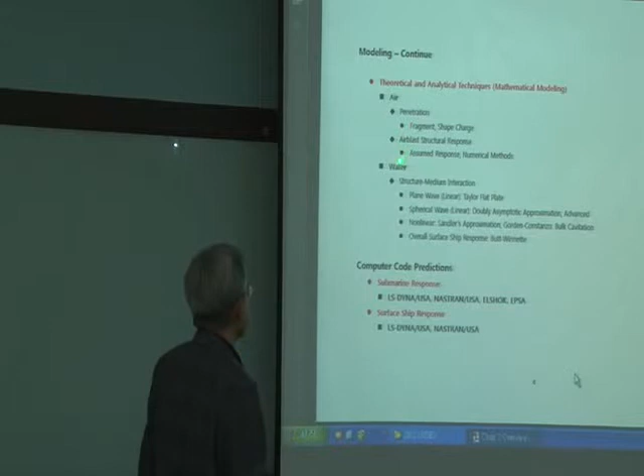Another approach in the modeling is mathematical modeling. So mathematical modeling, you can divide this into air and water. You can study air's penetrations, and then for air, it's an air-blast situation. Water is structure-medium interaction. This is really FSI, fluid-structure interaction.

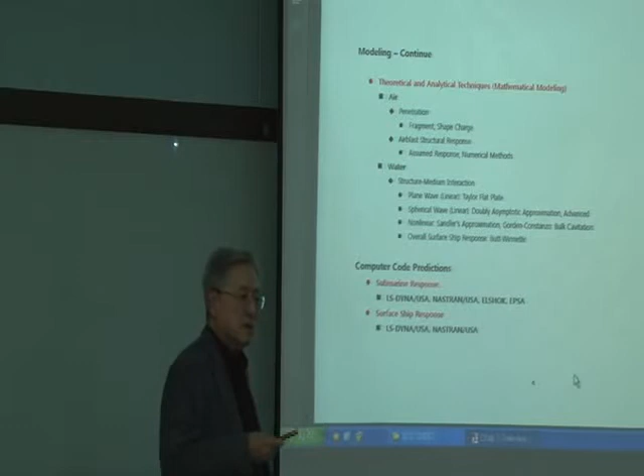Everybody seems to be teaching FSI, but FSI in their field, in their concentration, is what fluid-structure interaction means. Like Professor Park is really expert in acoustic structure interaction, and Higyo is working on acoustic structure interaction. Why acoustic? Acoustic really means shock wave and structure interaction.

The beginning of structure medium interaction. Medium could be fluid. And for gas explosion areas, medium could be the oil or oil-oxidizer mixture. And the beginning is Taylor flat plate theory, which is really the basis, simple, a very nice basis for understanding what FSI is.

That's what I'm going to introduce. And another one is DAA, doubly asymptotic approximation technique.

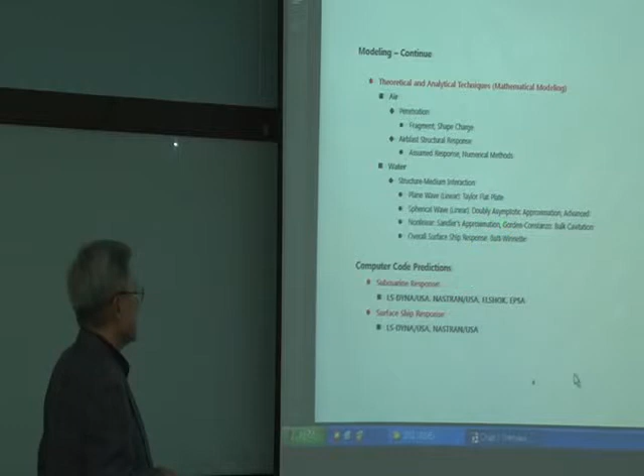Tom Geers developed this not from some theoretical source, but by empirical sense. He put the equation together, building the first order, second order approximation. And nonlinear Sandler approximation, Gordon, and Costanzo. Gordon retired years ago. Costanzo is still working on bulk cavitation computation.

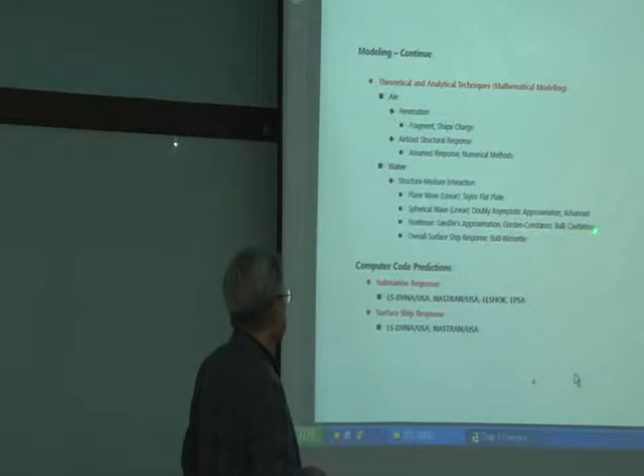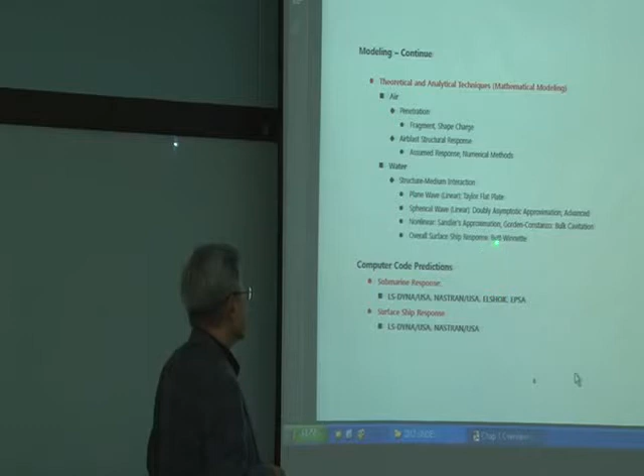And overall surface ship response, this is a very simplified, beautiful approximation technique. Butt, he retired some years ago, at least 20 years ago. Winnette, he retired, I think last year.

So I'm going to show you some, okay? Then you can feel it.

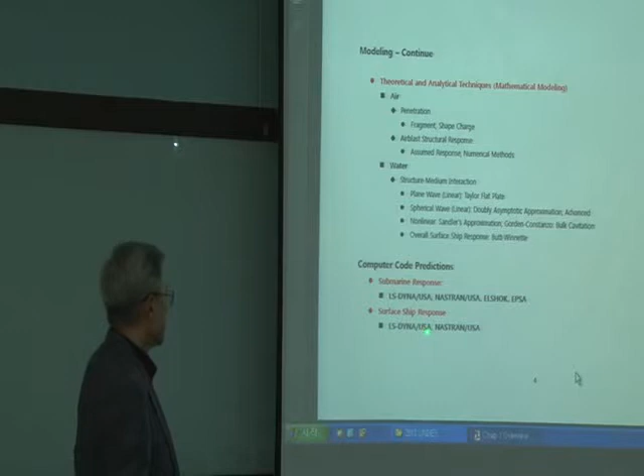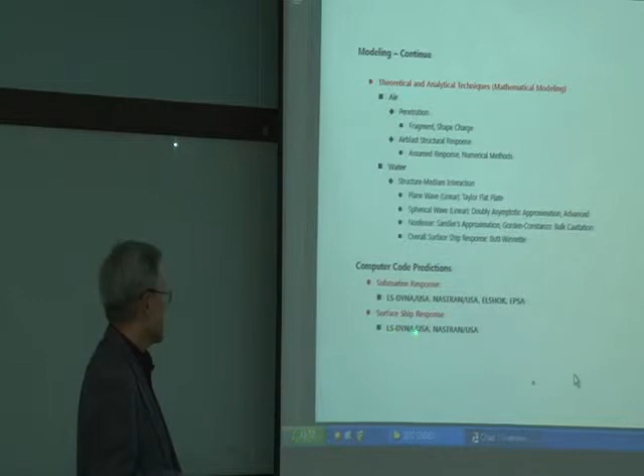And the computer code predictions for surface ships, as we are using it, LS-Dyna itself for near field explosion, and for far field explosion, we are using LS-Dyna combined with USA or Nastran USA. So either software predicts really well, okay? But we are going to use this USA and LS-Dyna.

So right now I think Gaulgi and Dr. Kim, you have to really go through, not this.

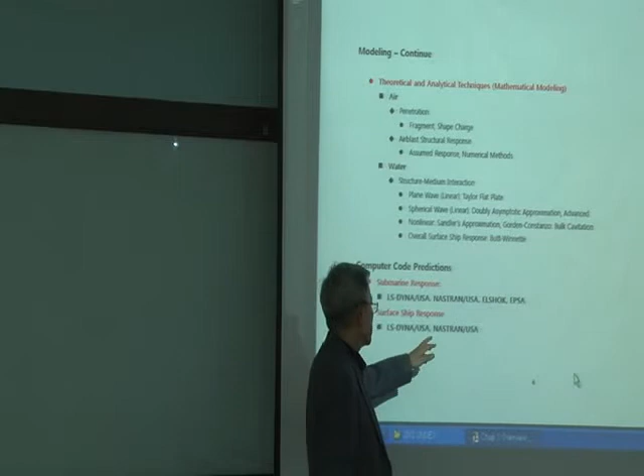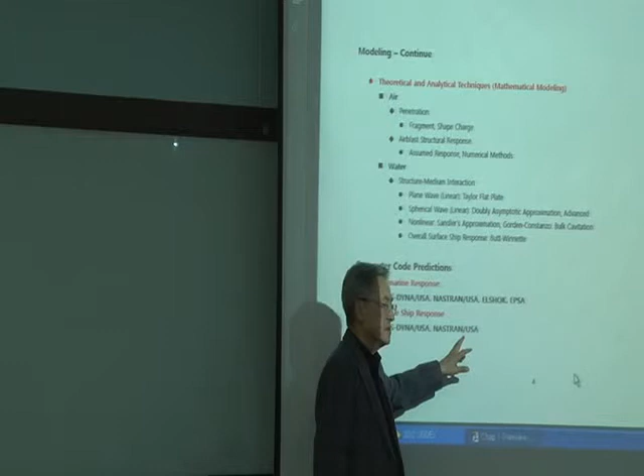In 1995, when I was at Naval Postgraduate School, we first used Nastran combined with USA. At that time, only the implicit integration technique was available, so you can't handle the large size of the FEM model.

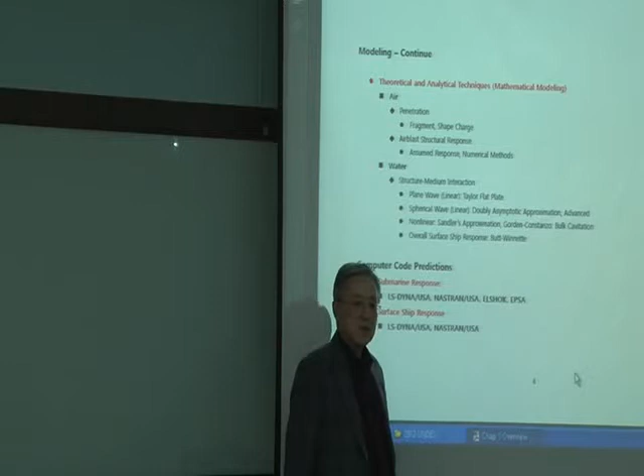But at that time, LS-Dyna had only the explicit integration scheme, so this is much faster. So we switched from here to here. Since then, we've used this all the time.

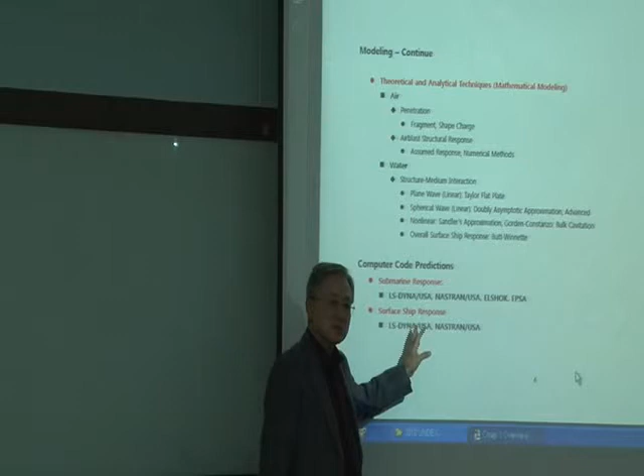But nowadays, Nastran has had explicit integration schemes implemented a few years ago. And LS-Dyna didn't have an implicit integration scheme, but now they have it. We needed that to conduct modal analysis to get the modal shapes and natural frequencies of all that. So nobody tried it before because this is really for transient response computation purposes mostly. But this is what we are using now.

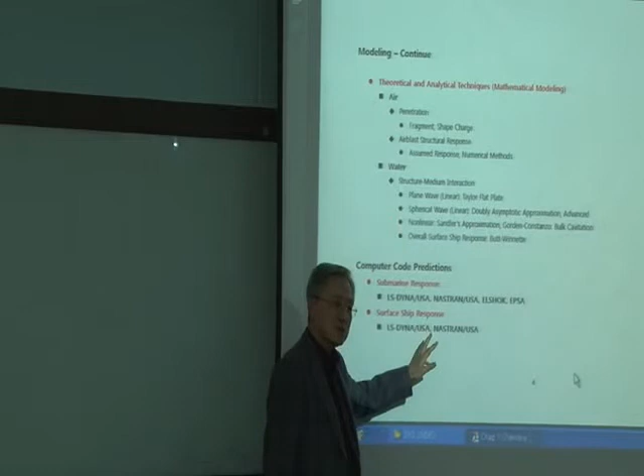And some people say, why don't you just write the code for this? Whoever says that doesn't know what LS-Dyna is doing, how complex this is.

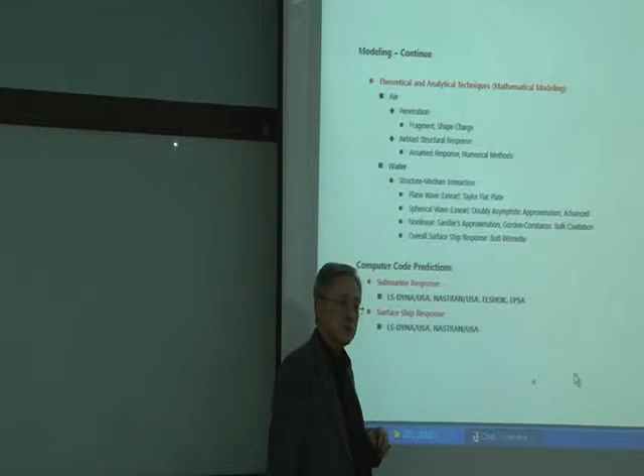John Hallquist developed LS-Dyna since 1970, so it's about 40 years, day and night. He's still writing the program, a Fortran program, which is very similar to, not identical.

So this is an overview to let you know what's going on around explosion - what kind of explosion you will encounter. But here it's for defense purposes. As for explosion, learning explosion, this is one heavy part of explosion.

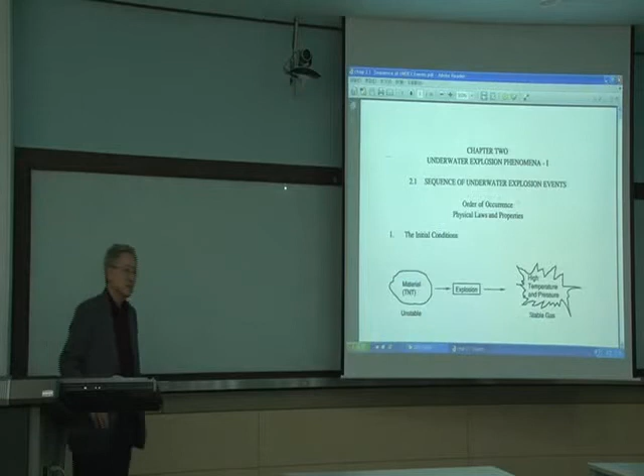Another part is really the gas explosion. It has common things quite a bit, so in that sense it's good. Any questions? This is just an overview, drawing a big picture before getting into the smaller parts.

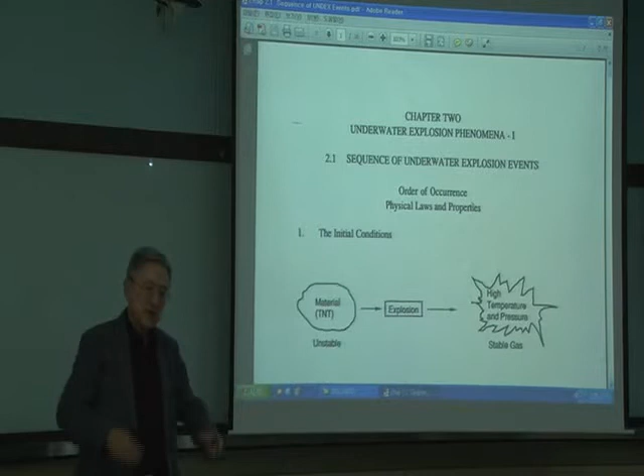From now on, from chapter 2, like 2.1 through 2.4, I'm insisting you must know 100%. Again, 2.1 is within the underwater explosion. I'm going to explain what is underwater explosion, what does it do. That's the part in 2.1 I'm going to cover. So we're narrowing it down. Again, air explosion, underwater explosion - learning the phenomena is very important.

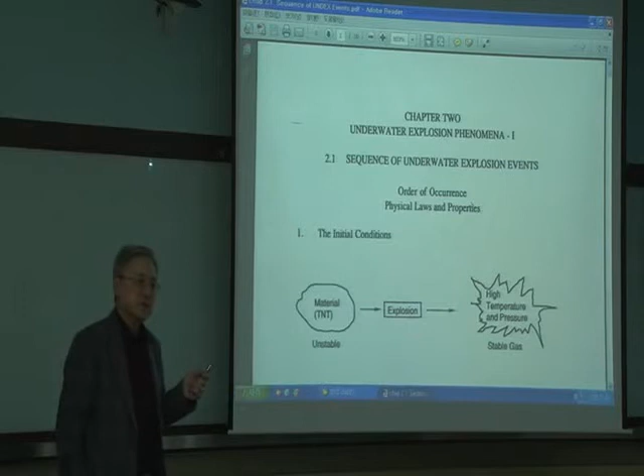Okay, then after that, mathematical expressions will go through. In chapter 2, underwater explosion phenomena part 1, and next is part 2.

This is from the book written by Robert Cole. Some of you have that book. The title is Underwater Explosion. If you want, I'd like to have that book, I can provide you. I have a couple of extra copies, but Abdullah, you don't need a book - learning here is good enough. Maybe Dr. Kim, I gave you one? No? It's called The Underwater Explosion, written by Professor Cole in 1948. It's an old book, but that's the beginning. You have one? I don't think Hyung-sung needed it, but Higyo has one kind.

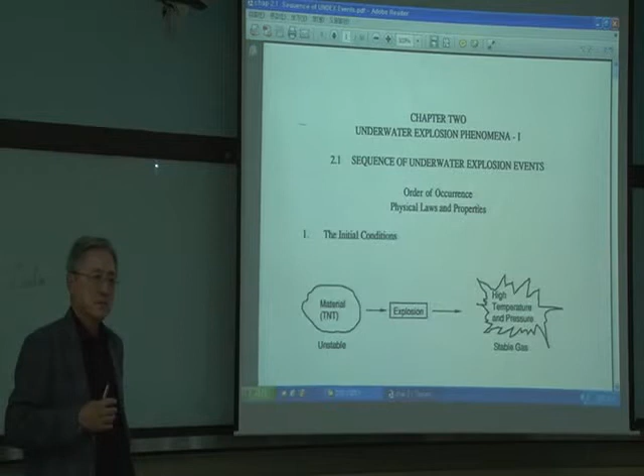So this is really covering the phenomena. I feel the way I explained would be good enough to understand the context and phenomena. I taught this kind of class many times for the last 25 years, traveling throughout the world - it was fun. Everything was free, accommodation, room and board, all free.

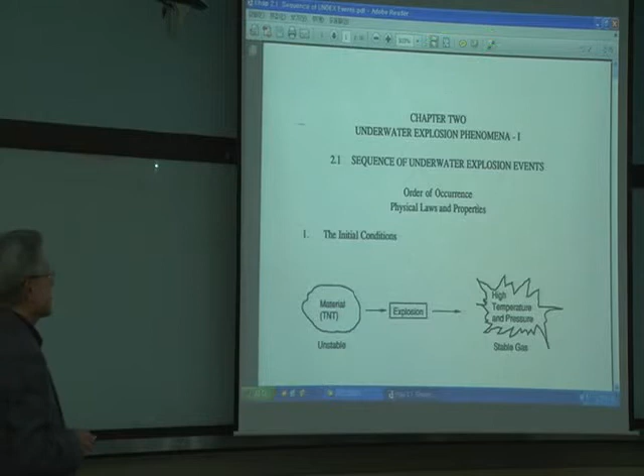So a sequence of underwater explosion events, order of what's happening, physical laws and properties. First, initial condition - starting from what's the explosion? I'm talking about the explosion of TNT, RDX, C4. That's the chemical explosion. Material means it's really explosive, and explosion occurs. The TNT material is, I said, a very unstable material.

When I say unstable, you always have to concern yourself with what does it mean stable, unstable - there's some relativity you have to consider. Is unstable meaning if I touch it, it's going to explode? But TNT is not an explosive which is sensitive. Of course, if you just have TNT and drop it, by the impact it could explode. But if you just handle it with care, that's good enough. It's like a powder - TNT is really powder, and they put it together.

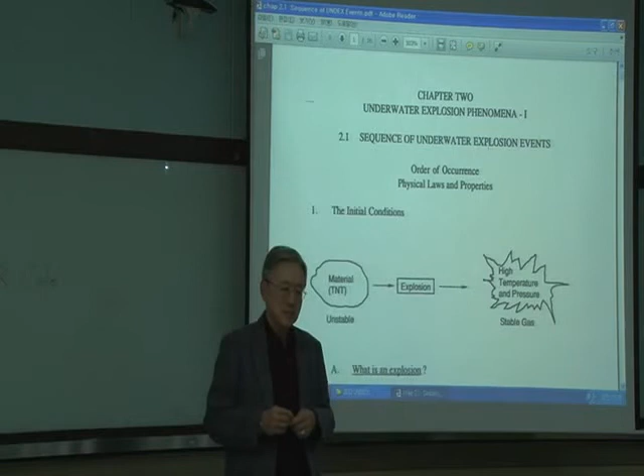That's not exactly TNT, similar to TNT, but for mine explosion situations they use that emulsion dynamite - I forgot the exact name. I handled it, everybody handled it. They just mold it to make a spherical shape, which is okay. But if it happened in the U.S., you would never ever touch the explosive - at least 50 meters away, you have to put up a small tent and store the explosive. Very safety conscious. But here, I don't see they kick around the dynamite ball, but that's what we can do. In other words, TNT is not greatly sensitive to impact. Of course, if you drop it, it could explode, so you shouldn't, but you should handle it with care.

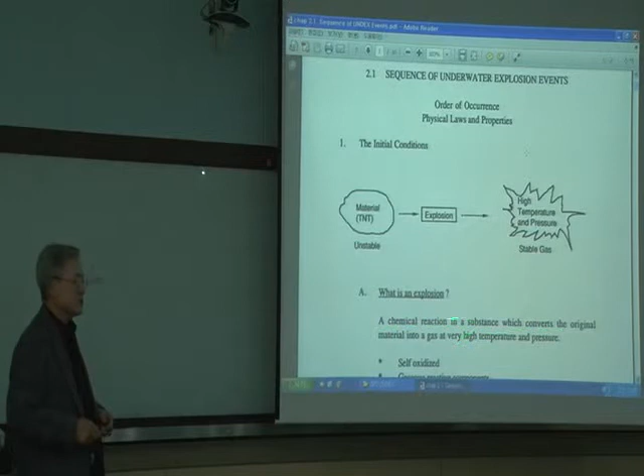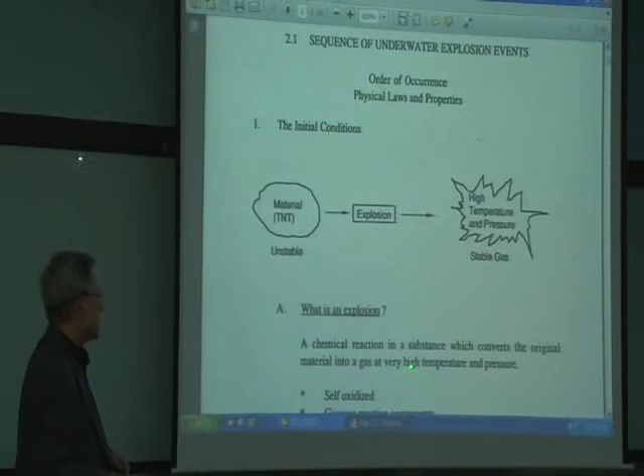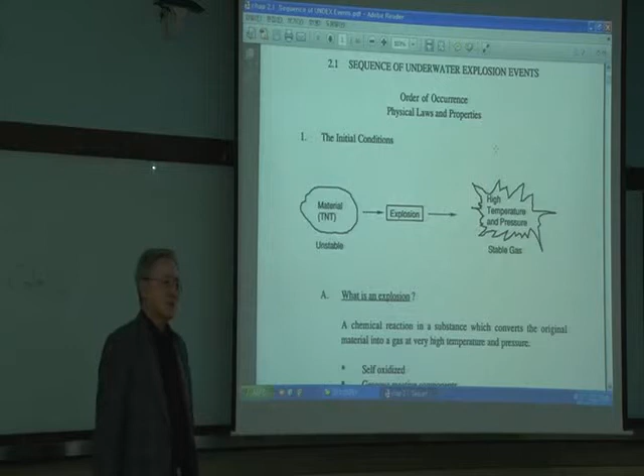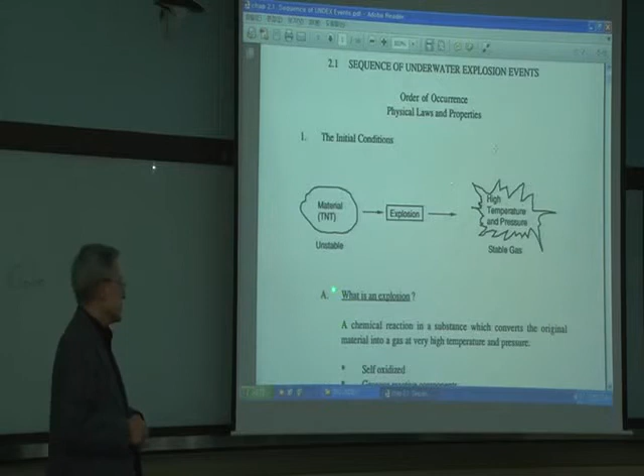So unstable compound - explosion, what is explosion? I define chemical explosion, such as TNT, as a chemical reaction in a substance which converts the original material into a gas at very high temperature and pressure, released as a result of explosion. Then it becomes a very stable gas. That's what human nature is - that's what natural things want to do, everything going from unstable into a stable environment. Exactly the same thing. So what's explosion? Chemical reaction in a substance which converts the original material into a gas at very high temperature and pressure.

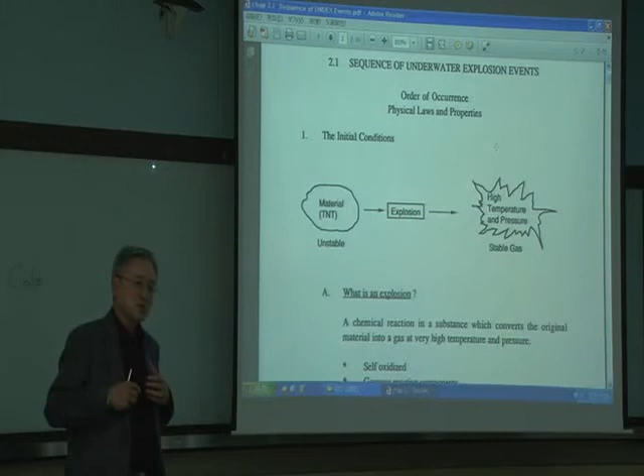This explosion happens in the water. In the water, heat is absorbed through the water rapidly. So when you're dealing with underwater explosion, you don't have to worry about the heat problem. Heat parameter is out for underwater explosions.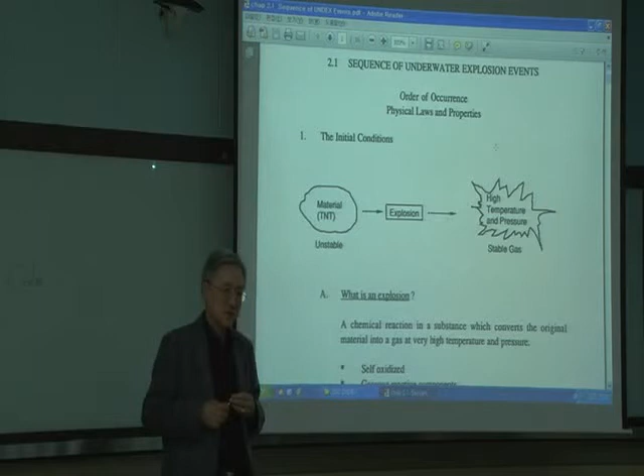If it's air explosion, then what happens? Heat is a concern. For nuclear explosion, heat is the main concern. Radiation of the heat is the main concern. And when you simulate the nuclear explosion...

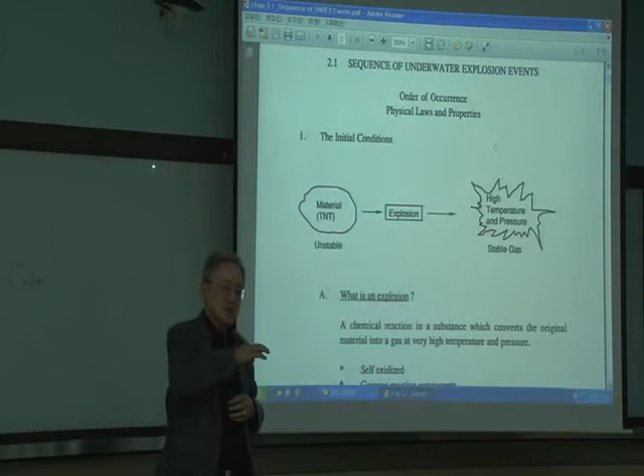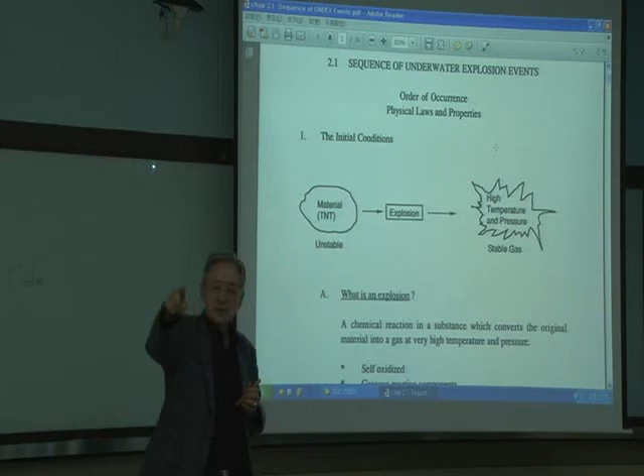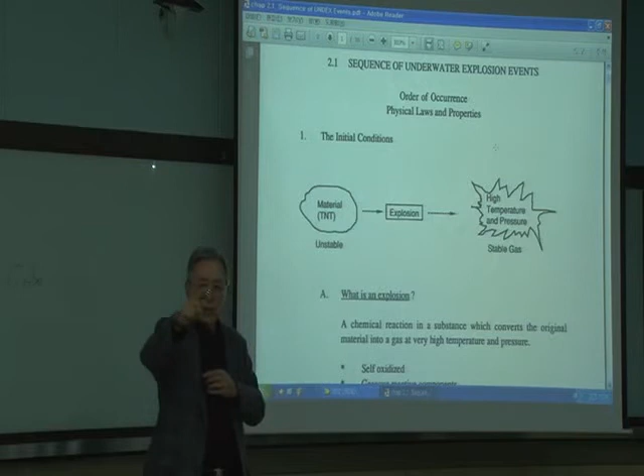Whatever I talk about is unclassified. What the U.S. Defense Department did is, in the desert area - Nevada is a desert in the U.S., just away from Las Vegas is all desert - they built a tower, a huge tower. I forgot the height of the tower. And they put small buildings, I forgot what radius, what side length from the structure.

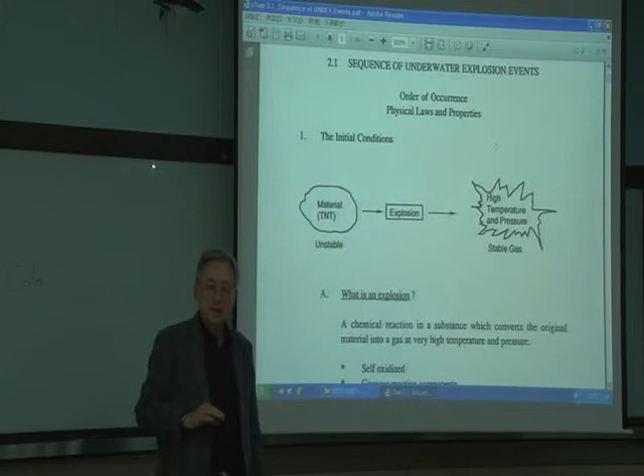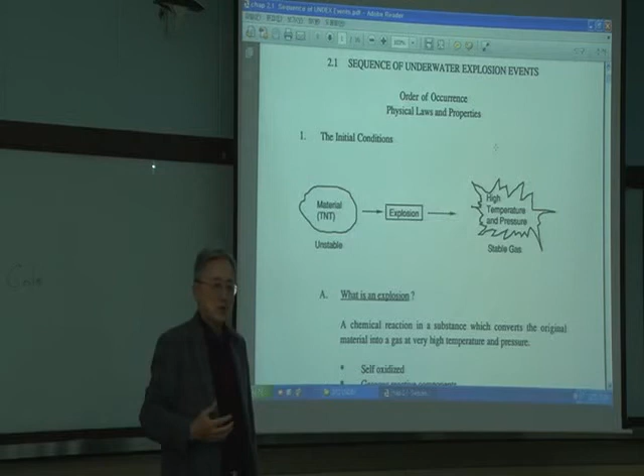What they did first to simulate the nuclear explosion is put a thermal shield in front of the structure. Because in the nuclear explosion situation, heat is coming first. Heat just kills, melts the structure before the shock wave really hits. Very, very detrimental. Even if it's high strength steel, when the heat hits first, it's going to melt and all the material properties change. Then how good is it to analyze with the material using the original material properties?

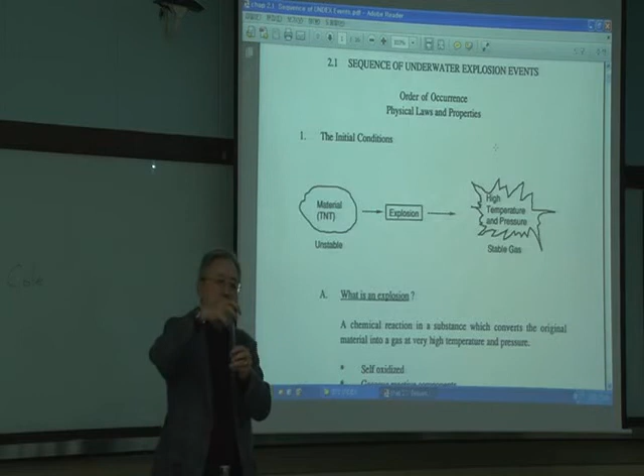So what they did at the top of the tower, they put something like 40,000 pound or 100,000 pound explosive at the top, very high. Then around here they put the structure, then they put the thermal shield. Before they explode this, they ignite the thermal shield to give a similar explosion effect.

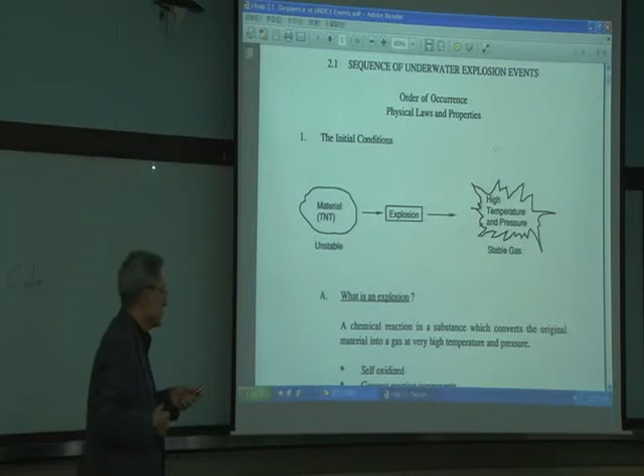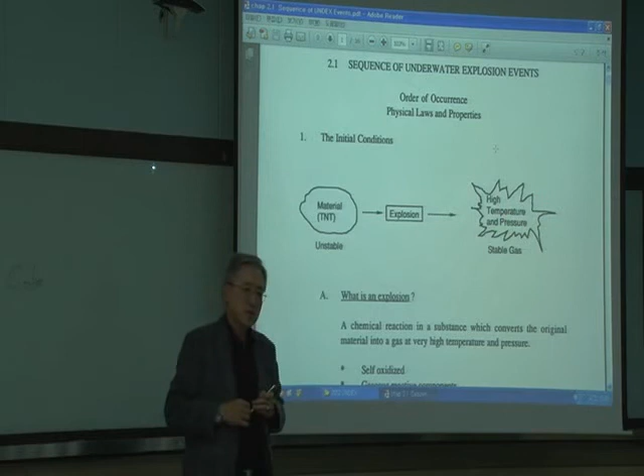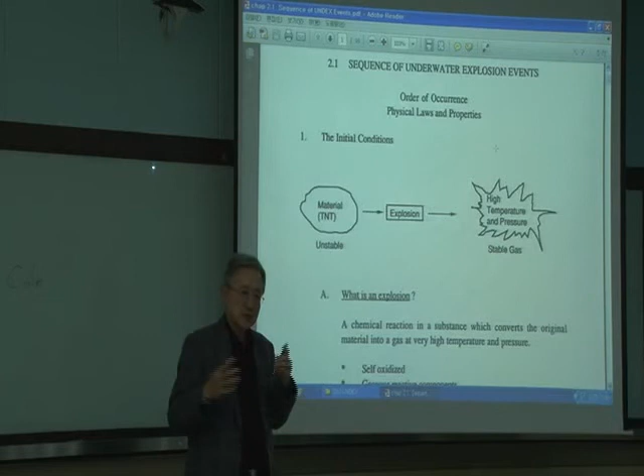So that's what you have to be concerned about: high temperature and high pressure. For underwater explosion problem, then you have to worry about the shock pressure and interaction with the submerged target, whatever that is. So that's what you have to be concerned about: submerged target, pressure. Temperature is not a factor.

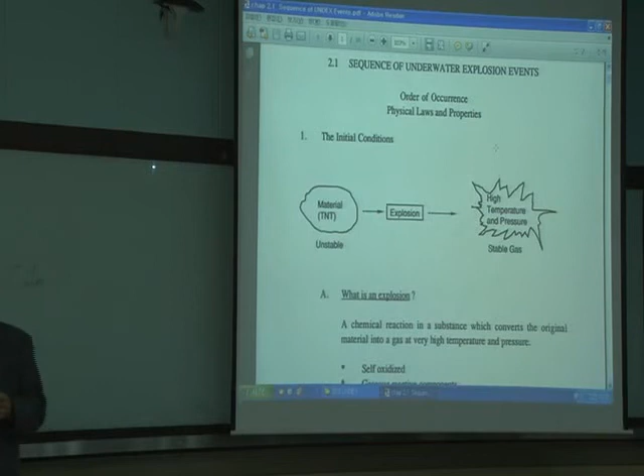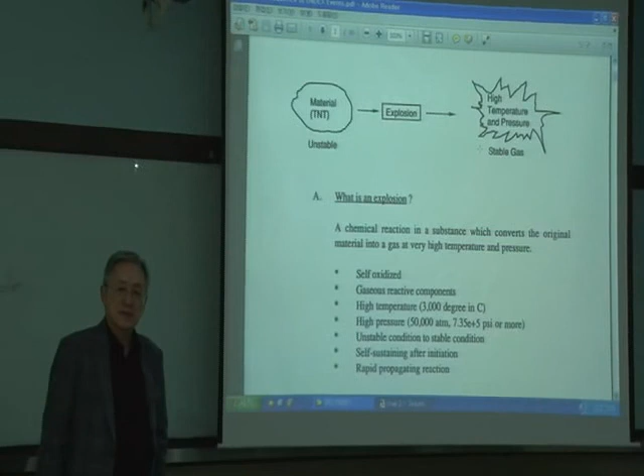And as the explosion is concerned, once it happens, you can't stop it. Gas or oil problem, same thing. Gas plus oxidizer, or the mixture of oxidizer with the fuel - once the explosion occurs, you have to keep away and let it finish by itself.

But for chemical explosion, the time it takes is not long. For the physical explosion, the time it takes is a millisecond, on the order of a few milliseconds, thousandths of a second. So everything is done so quickly. But you don't have to provide oxygen to really burn - it just happens by itself.

Gaseous reactive component - usually TNT is gray or white material, but after it explodes in the water, if you see it, it's all black stuff remaining as powder. High temperature...

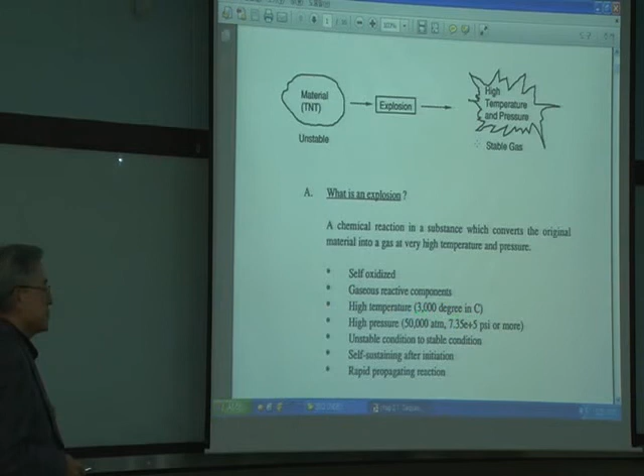3,000 degrees on the Celsius scale, different from the gas explosion in a sense. Pressure, 50,000 atm, amazing. But gas explosion, we are talking about a few bars, or less than 1 bar dynamic pressure. But 50,000 atmospheric pressure is about 7.35 times 10 to the 5th power psi.

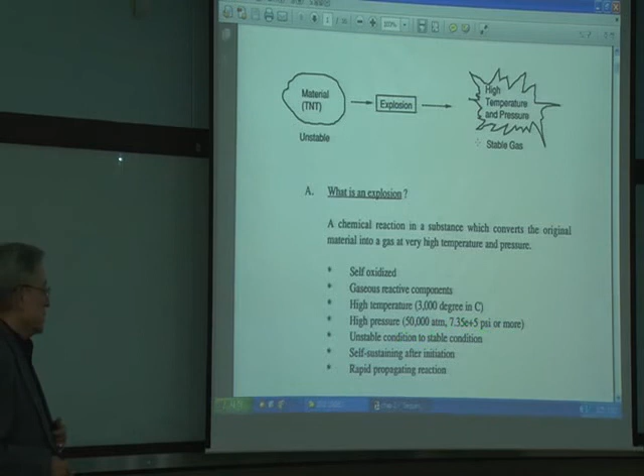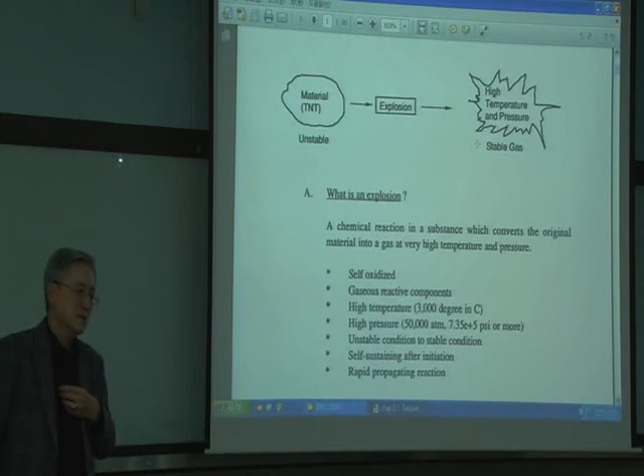Pound per square inch is the US unit, but I'm insisting on knowing both, not just the metric, not just the US gravitational system. But nowadays you have a hand phone, you can touch it, and one hand does everything - all the conversion you can do. So 1,000 psi is how many megapascals? I looked at it the other day, it's about 6.9 megapascal. So that you can convert.

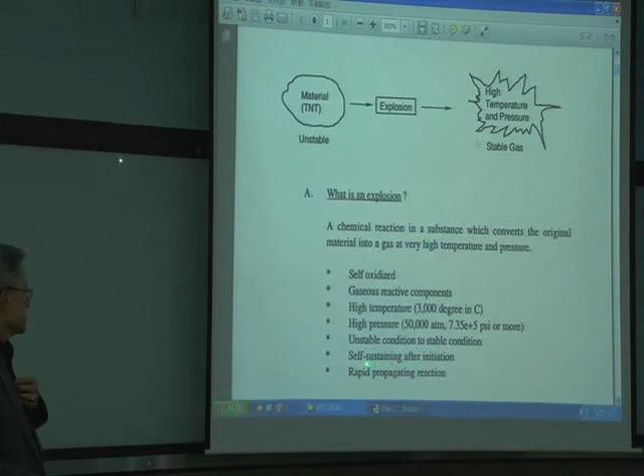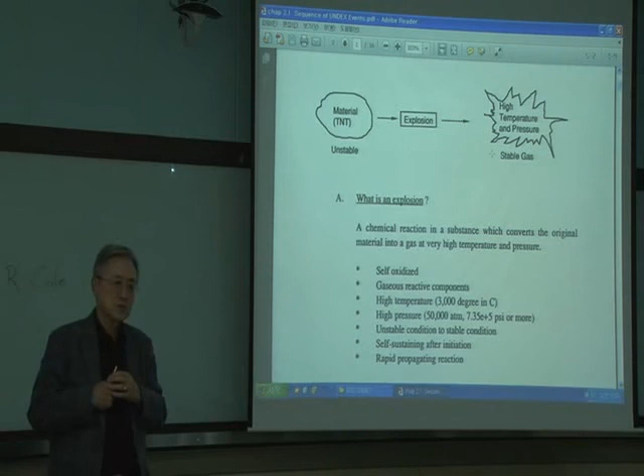Unstable to stable condition, self-sustaining after the initiation. Once it explodes, it will go whether you like it or not. It propagates very fast. At the beginning, when it explodes, it's going to generate the detonation process associated with the detonation velocity, which is about 8,000 to 9,000 meters per second. Then it converges into the acoustic speed in the water, which is about 1,500 meters per second.

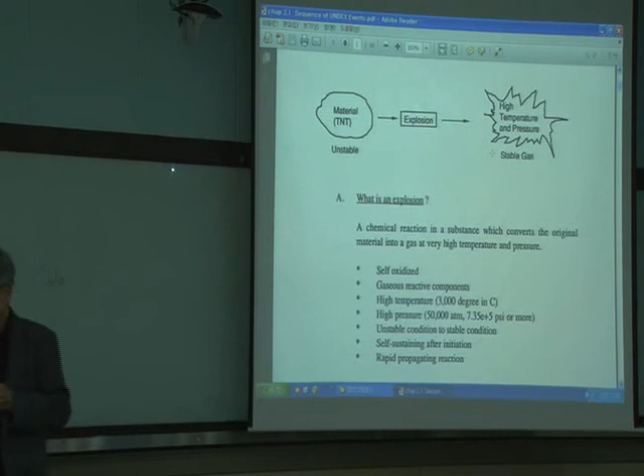You already heard a few times before about this possible...